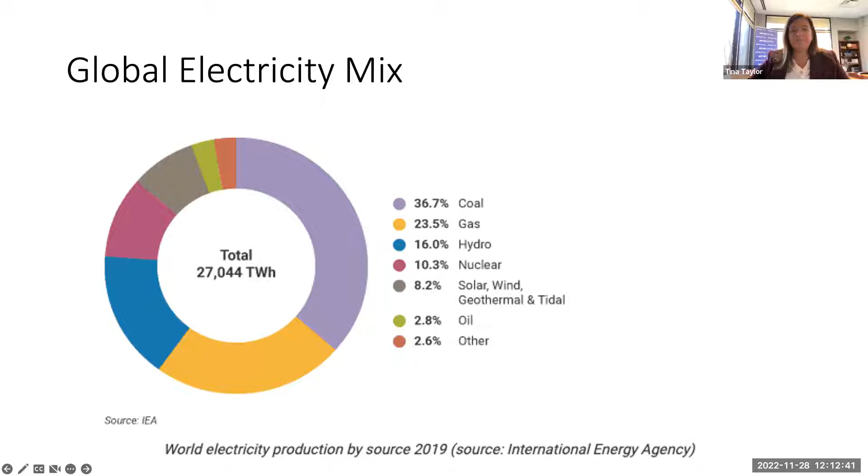We built most of the nuclear fleet between 1970 and 1990, even around the world. I mentioned that the US started first, has the oldest fleet. And then there's been a real slowdown for the last 20, I guess 30 years, where we're just building a couple of plants at a time. And this really plays into what the capability is to ramp up and do more.

So there's a lot of constraints in the existing pipeline. Currently, large plants require very large forgings for the reactor vessel and some of the larger components. And there's limited capability in the world to produce and provide those large forgings. The supply is meeting the current demand, but a rapid increase will require substantial new ways of thinking and new investments. And if it's not done at the right time, it could impact our ability to expand.

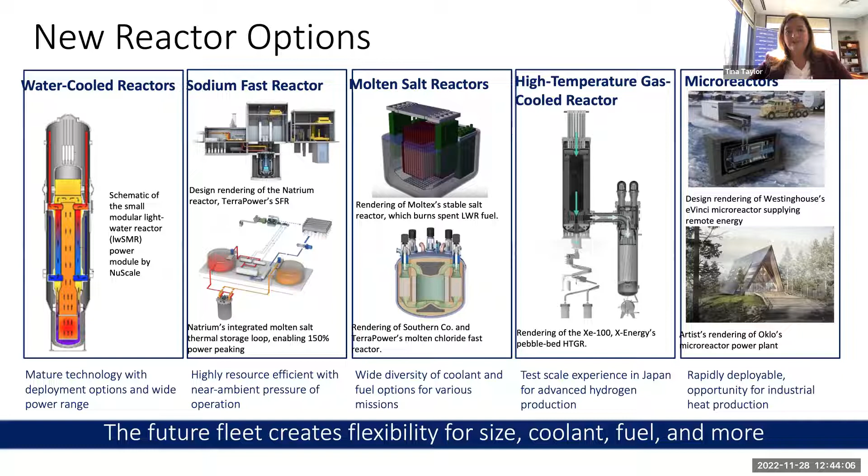And probably the most important thing is a real growing consensus across all different sectors of our society of the role that nuclear can play, the need for nuclear, the acceptability of nuclear. And I can't underscore how important this really is for how we've arrived at where I see us at today with this huge amount of opportunity in the future. Because it's not just having technologists or scientists being sure that nuclear is carbon free, being sure that nuclear can be operated safely, designing these great new technologies. It really does require public acceptance. It requires political support, or at least not political opposition. It requires policymakers and planners and investors to come together.

And we, I think, have arrived at a point in time where we have more different sectors of society coming together on nuclear than maybe anything else. I don't know if we as a people of the world agree on very much these days, but there is a real growing consensus around nuclear. And even those organizations, voices, groups of people who have been anti-nuclear in the past really seem to be coalescing around the value and acceptability of advanced nuclear. Even where people have concerns around nuclear waste, they're putting that in the context of the need for decarbonization. And this coming together of all these voices really has created the opportunities, the open doors for nuclear for the future.

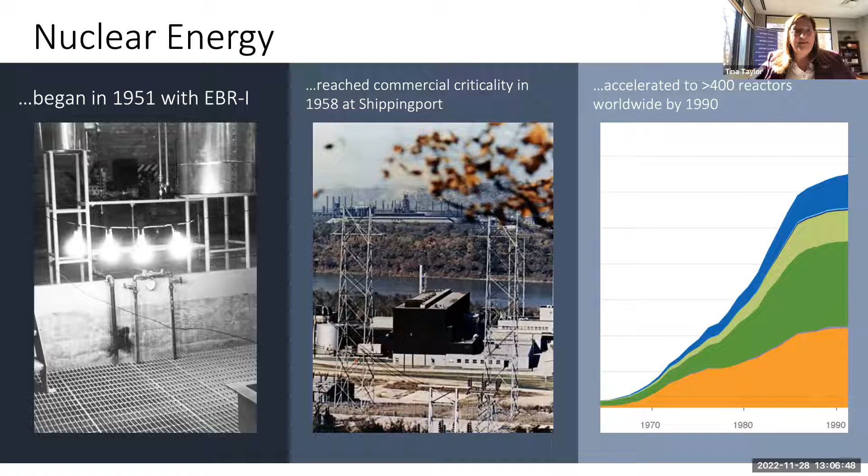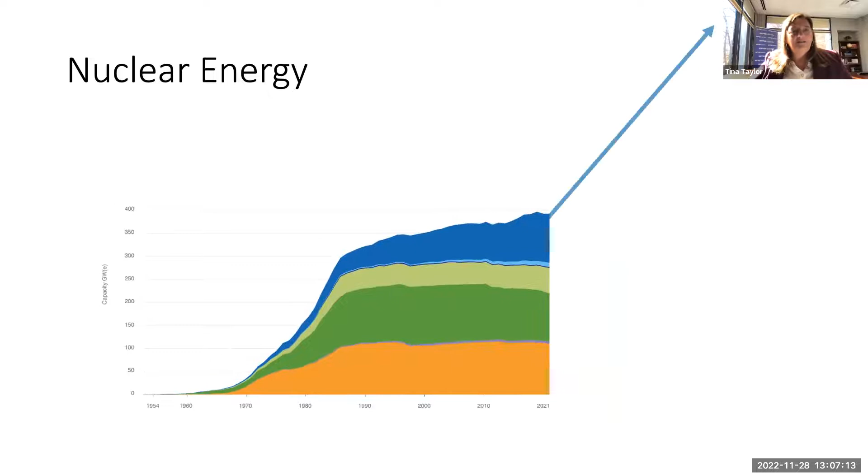But then it really plateaued from, you know, 1990 to 2021, today's situation—it's been pretty flat, slow growth. You saw this on the chart I had earlier showing nuclear plants by year. So when we look at what's been done historically compared with what I talked about coming next, it's a really huge challenge. Now, in some cases, we can look back and say we've built these many plants before, so we can build them again.

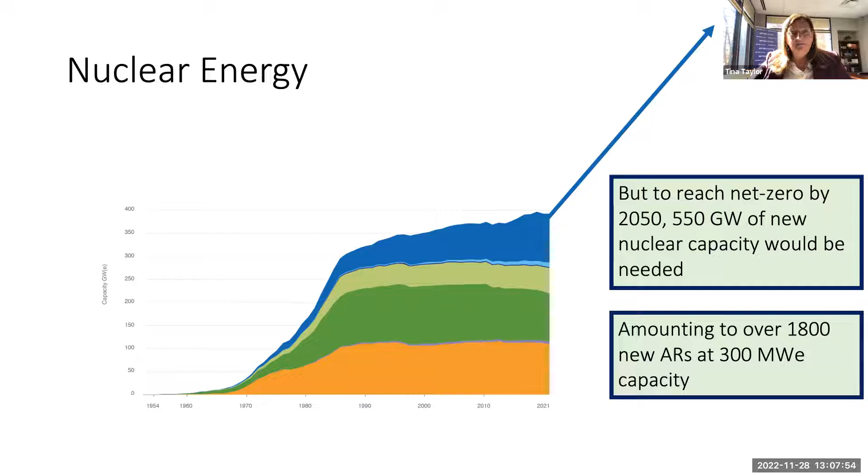All of these projections of doubling and tripling the nuclear industry have uncertainty in them. But I will tell you, this is going to be a huge lift, because the industry is not in the same mode it was between 1970 and 1990. It really is in this mode of having the capability to build a few plants each year dispersed around the globe. So I want to give you some appreciation for the things that play into that. One analysis looked at what rate is needed for new plants to achieve some of these high aspirations.

We're looking at 10, 20, 25, 30 plants a year coming online as we go through the next few decades. Historically, we've peaked at about 10 plants max in some of the more recent years, and it's actually slowed down in the last couple of years.

There are a few things seen as really important to leveraging new capabilities to build more plants at once. One is this idea of a level playing field—having flow of financing, having some certainty in the value of that electricity. This is significantly impacted by things like including nuclear in the European taxonomy, the Inflation Reduction Act in the US, and other policy changes.

Another important thing is an effective safety paradigm. Of course we've got to keep all the plants safe, but we need the right paradigm such that plants that are inherently safe with different new designs can recognize those benefits—that regulation and requirements are reflective of the enhanced technology available, and not just overlaying all the same regulation developed for the existing fleet onto a new fleet that's inherently different.

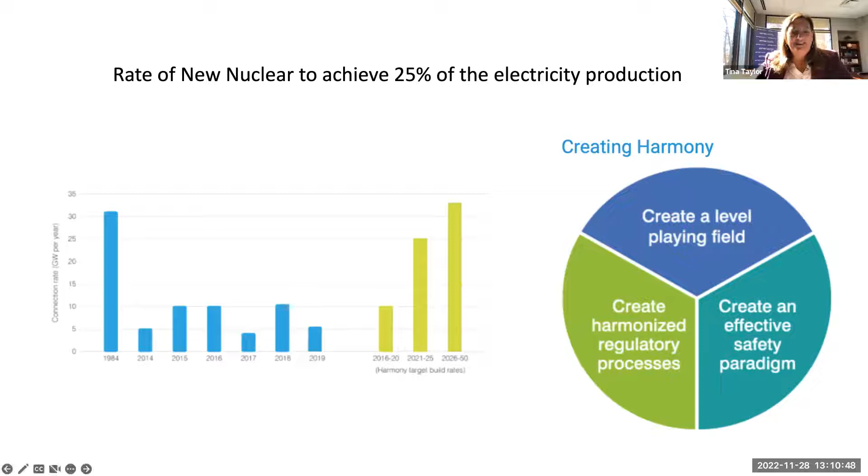We have been building new plants slowly, but a key thing is that they've almost all been built in China and/or by China and by Russia. Almost all plants currently on the books for future plans come from China and Russia. China has good experience building these plants and a good supply chain—they've mostly been building inside their country. Some of their efforts to build outside their country have been thwarted by different political viewpoints around the world.

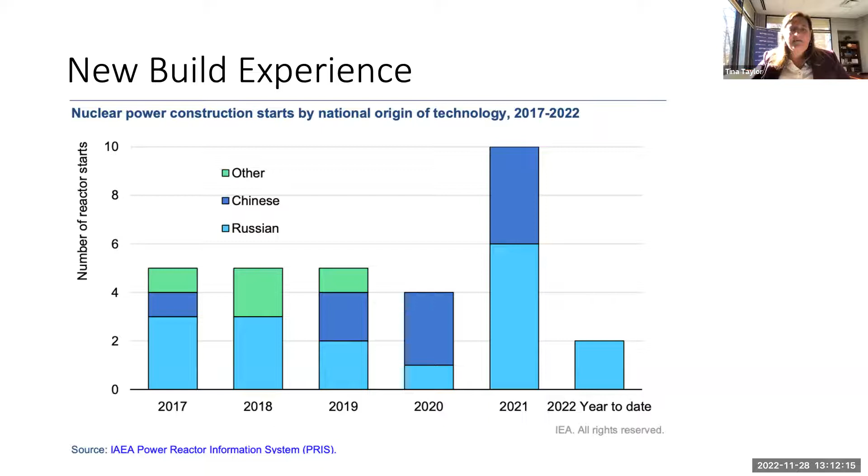Russia had been rapidly getting engaged in a lot of new countries with contracts to provide systems and finance it. What's happened in Ukraine this year has highlighted concern about everybody having their eggs in that basket, and different countries have reacted differently. This chart illustrates that very few countries around the world have ongoing capability to build a nuclear power plant today. In the US, we have 2 plants being built, and they're almost done, but we don't have the capability to just send all those people to build 4, 5, 6, or 10 at once. So there's a lot of limitation there.

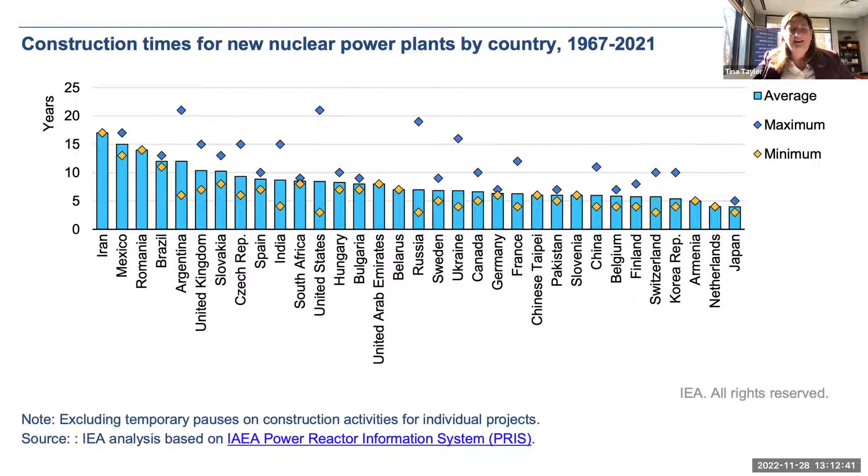Looking at recent experience—actually, I think this is all the experience—we've seen a lot of projects take significantly longer than was envisioned. Some of these plants have taken 15, 20 years to come online. There's a lot of concern about that, not just how long it takes, but the uncertainty in that time. This is also reflected in a chart showing initial projections for time and money to build some of the more recent plants versus what it's actually taken. Our experience in the US with the Vogtle 3 and 4 plants is really significant, and leaves a lot of concern by investors and companies about their ability to embark on the next plant.

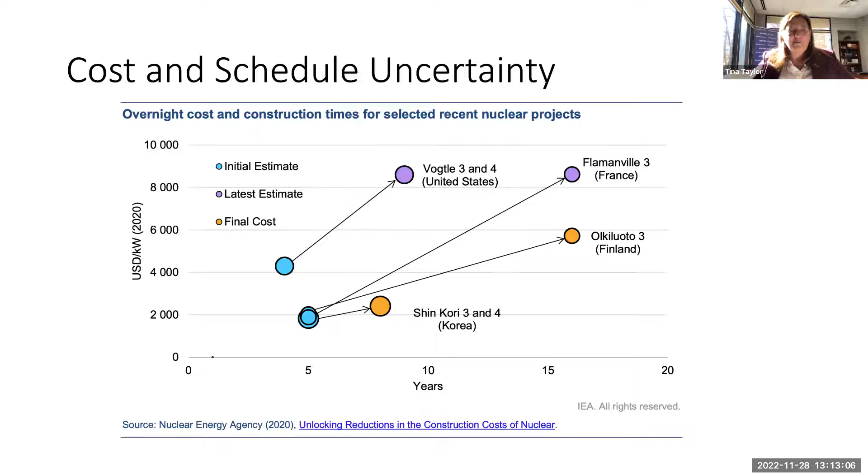EPRI recently conducted a workshop looking at supply chain challenges, and this really was across the whole energy system transformation. So I'm talking about nuclear today, but we've got so many changes going on with the grid changing, with distribution, with expansion of renewables, distributed systems, end use growing, and electrification. So lots of changes going on.

This workshop considered all of them and looked at what are some of the major risks. And people are really worried about this. I think this is where we need to turn our attention next, to ready the playing field for nuclear to achieve the expansion that might be possible.

People aren't really building the factories to build the plants until there's plants to build. So there's a bit of chicken and egg there. Workforce is really one of the biggest needs emerging, and we're even seeing problems today. We can't conduct the scope we want to conduct in outages, and we may have to shift when we do some of our outages just to have enough people with the right skills to complete that.

With nuclear in particular, companies have to be qualified to produce some of the equipment needed in the plant. We saw a big loss of the number of companies capable of producing nuclear grade components. We're going to have to build more of that.

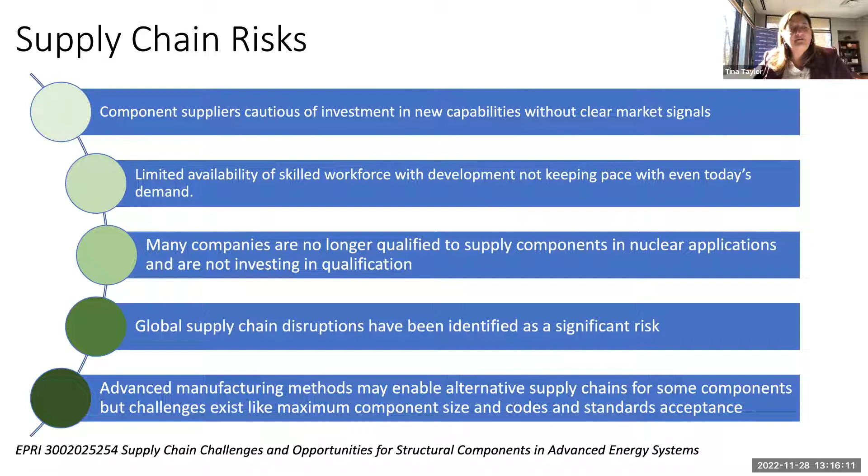And then fuel, I've already mentioned a little bit here. A lot of the new types of plants will use different types of fuel, and that requires approval by the regulator, which can take quite some time. We're seeing this even with modest changes we're making to fuel for today's plants, taking a long time to get them qualified and out there.

We'll need a tremendous increase. We'll have to double or triple our capability of producing nuclear fuel if we're going to have double or triple the fleet in the future.

And there's a lot tied here with politics and geography. Most of the fuel today is enriched and processed in China and Russia. We saw tremendous grappling with that as plants around the world want to keep running. Different countries have taken different stances on procuring or not Russian fuel. That's introduced competition into other suppliers, and the whole system is just so delicately balanced to provide today's needs that making a substantial change is going to really require deliberate work to overcome some of these hurdles.

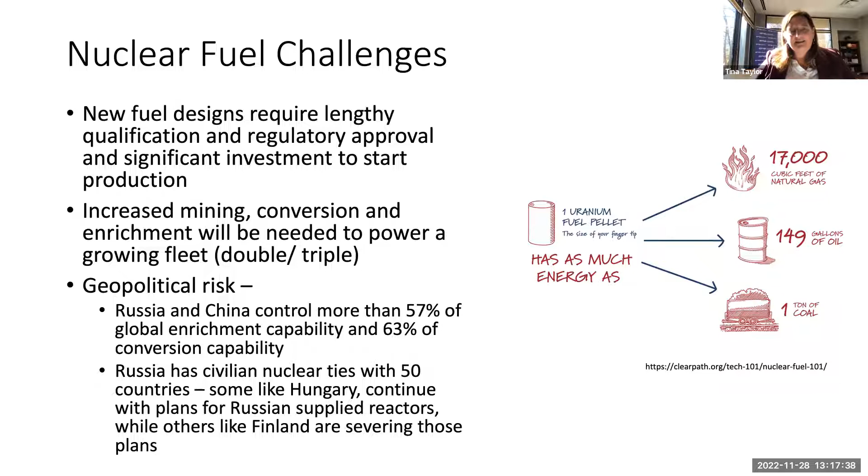And then regulation - I won't go much into this, but regulation is also probably going to be a key determination in how fast new plants can be licensed and built. I really do think there'll be a new paradigm needed here. When you think about doubling or tripling the plants, even if you just look in the United States, that's hundreds, 300, 400 actions that will have to take place. And right now, the nuclear regulator in the US is handling just like 3 or 4 activities at any one time. So it's not staffed to manage suddenly 100 applications to review, and this will have to be dealt with for things to go forward.

So I want to stop there for any discussion you want to have, and then I have one more point to make if we end up with time. Are there any questions or things you'd like to talk about?